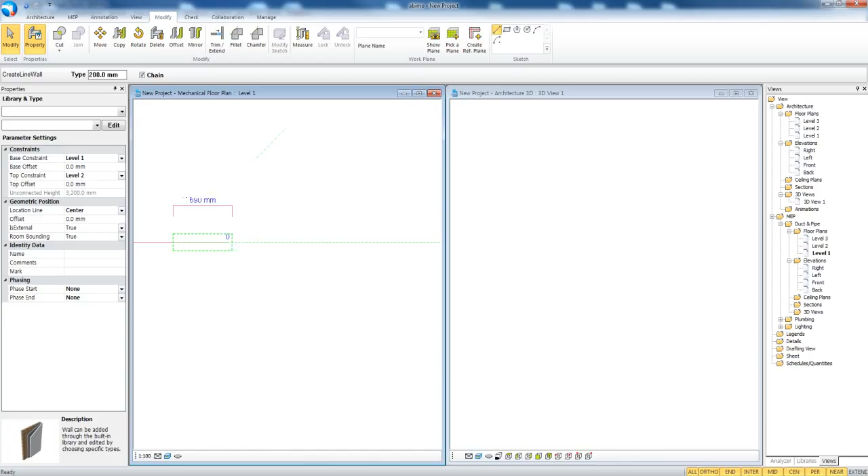So let me start with the modeler. The ABIMO Modeler is designed to model various types of building components. With the support of Parasolid Designer, the user of the ABIMO Modeler is able to model from the very basic architectural elements to the most complex geometries.

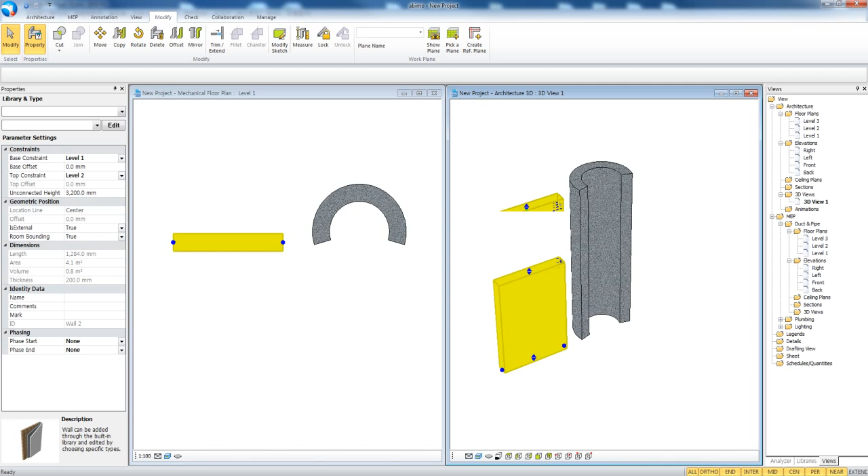By simply choosing a building component category from the menu, the user can easily start modeling the desired structure in a three-dimensional virtual space. Modeling in the ABIMO Modeler can be roughly classified into two types: linear type modeling and planar type modeling.

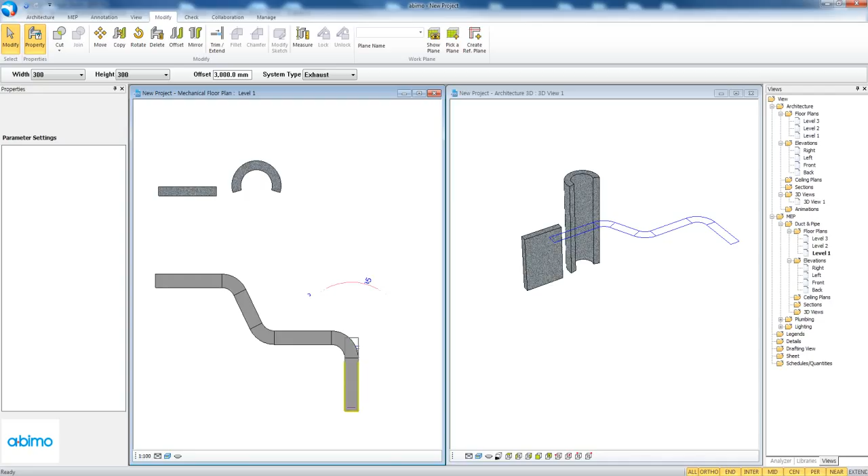Linear type modeling is a type of modeling where elements are modeled through clicking start points and end points. Through defining starts and ends, and eventually defining lines, certain elements are modeled according to the direction and length of the vector. Elements modeled through the linear type modeling include walls, stairs, ducts, or pipes.

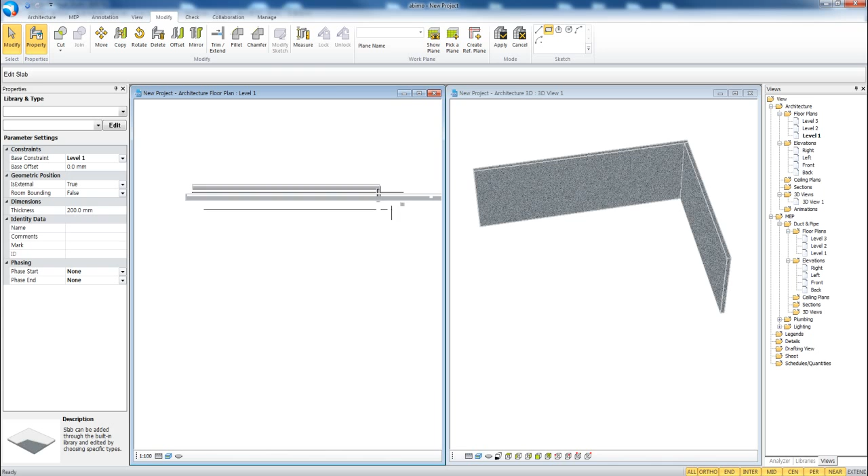Planar type modeling is executed through defining a certain outline of an area that defines the outline of the element you'd like to model. Here especially, you are automatically switched to the modifying mode, where you can edit or delete outlines before you click the apply button for it to get modeled into the actual element. Elements modeled through planar type modeling are floor slabs, ceilings, roof, spaces, etc.

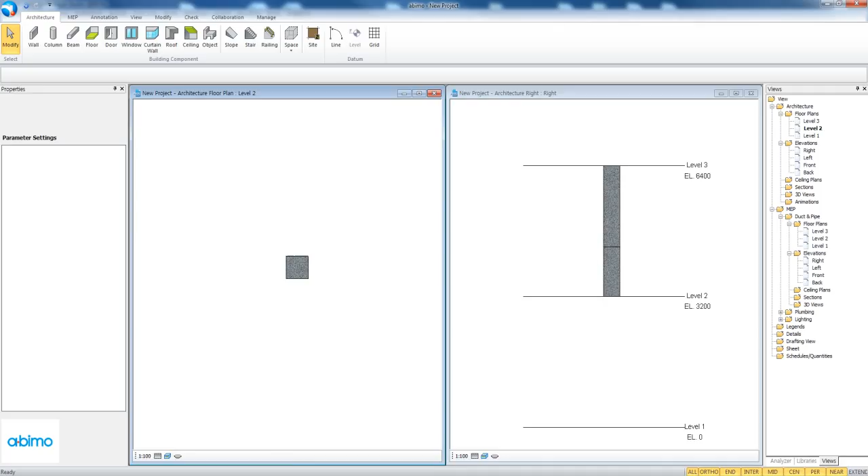Every element modeled in the ABIMO Modeler is tied to a certain level parameter. This means that each model is associated with a level, and its form, dimensions, and existence is dependent on how the level is defined. Take this column for example.

In elevation, you can see that the base is constrained to a certain level, in this case level 2. On changing the base constraints, you can see that it moves to a different level. By setting a top constraint, you can also link the top of the column to a certain level as well. And of course, when deleting a level, elements that are tied to that level are deleted with it.

Certain elements can be loaded from the library and inserted into the project. Here's an example of loading an escalator from the library and placing it into the project. Customized elements can be modeled in the library editor by the user and loaded back to the project.

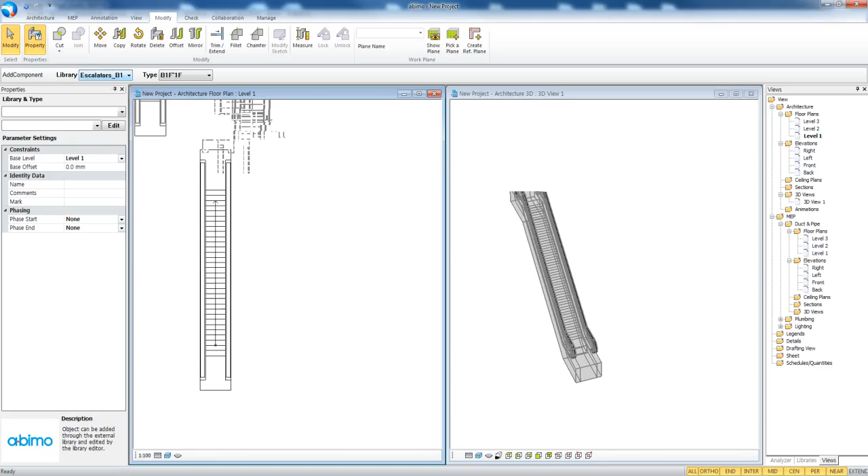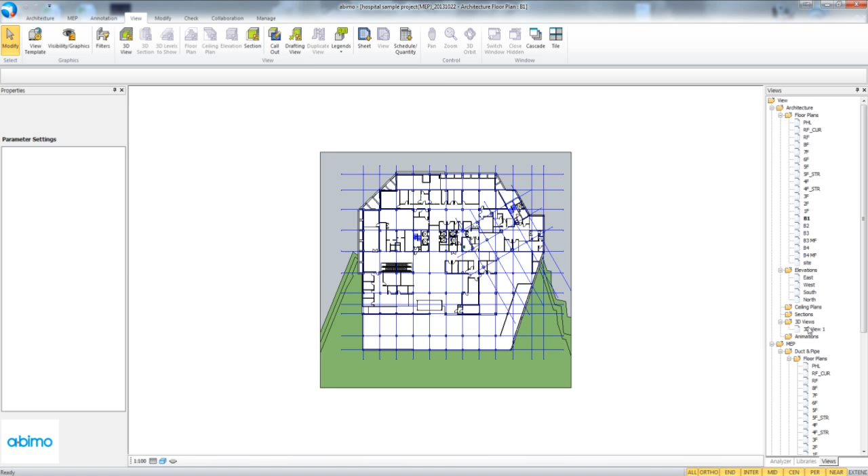This is an example of a project model from the ABIMO Modeler from scratch. You can see that all levels are showing modeled space of each story. Different elements are mapped with different materials. The main modeled elements include walls, floor slabs, columns, and beams. There are also other elements such as windows, curtain walls, stairs, and escalators, all modeled with the ABIMO Modeler.

Models in the ABIMO Modeler can be displayed in different types of visibility modes, such as hidden lines, wireframe, X-ray, shaded, or realistic. And now the ABIMO Checker.

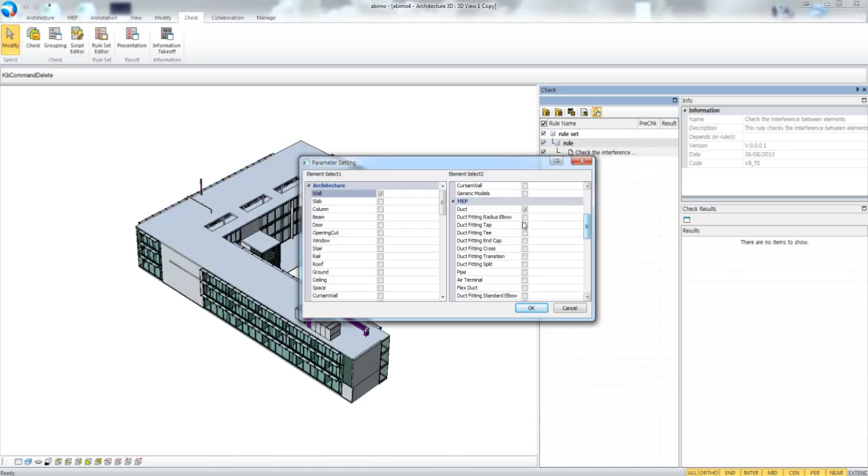The ABIMO Checker is a platform on which you can check the model project to see if it meets certain requirements, such as building regulations, area requirements, or rules for handicapped accessibility, and so on. Not only does it validate regulations, but it's also capable of checking physical conditions, such as interference between elements or connection validities. Here, I will check to see if certain elements run into certain other elements.

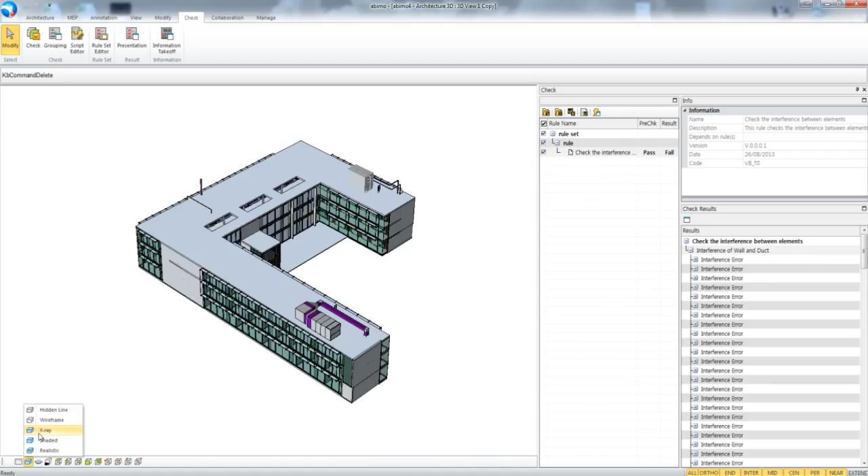After opening the project that I want to check, first I'll start with loading a pre-customized rule set. A rule set is a file made up of a combination of different rules for you to check on your project. In this case, I've set the parameters so that it checks the interference specifically between walls and ducts.

After loading the rule set, you then click on the Check button, and the checker will automatically check the model and show the checking results on the Check Results window. By selecting the detected particular elements on the Check Results list, the elements are highlighted in the model.

Checking if mechanical elements like ducts or pipes are connected to each other. This is an example of checking physical conditions of a model through a coded script.

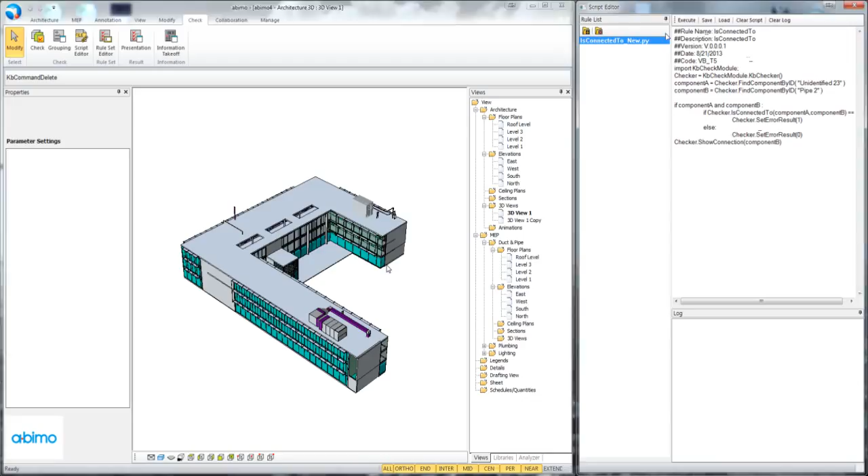By clicking on the script editor, you are able to load Python scripts that are written to check various conditions of the model, and in this case, the connection conditions of ducts. By simply typing in the ID of the ducts you want to check into the script, it automatically figures out the result for you.

Here you can see that the result showed a true status, which means that the ducts I've selected are connected. The fact that the ABIMO Checker can run scripted rules to check the model shows you how flexible it can be to accommodate various regulations.

Also, with the rule set editor, you can edit and combine different rules to create your own set of rules. So the significance of the ABIMO Checker is that it's highly adjustable and can be customized to nearly any type of rule imaginable.

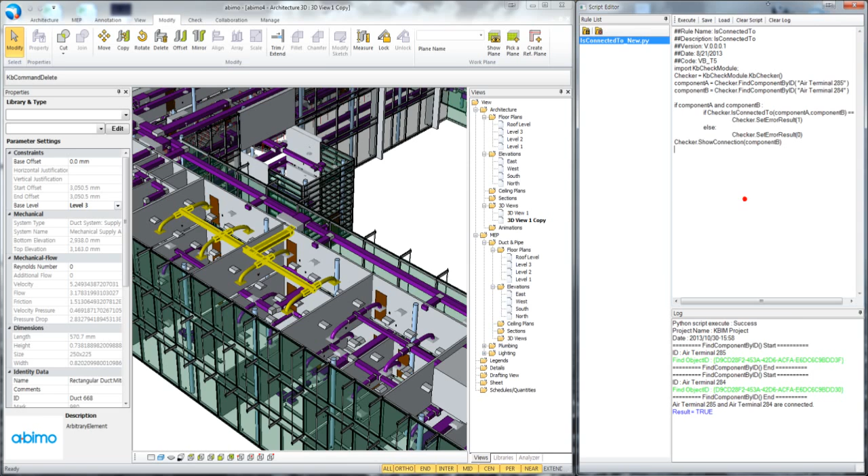The ABIMO Collaborator is a powerful collaboration system which lets you share a project with multiple collaborators. After connecting to the ABIMO server, the user can create a group for the team you're working with. By assigning each individual with different levels of authority to the project, you can set up an efficient working system for multiple people to collaborate.

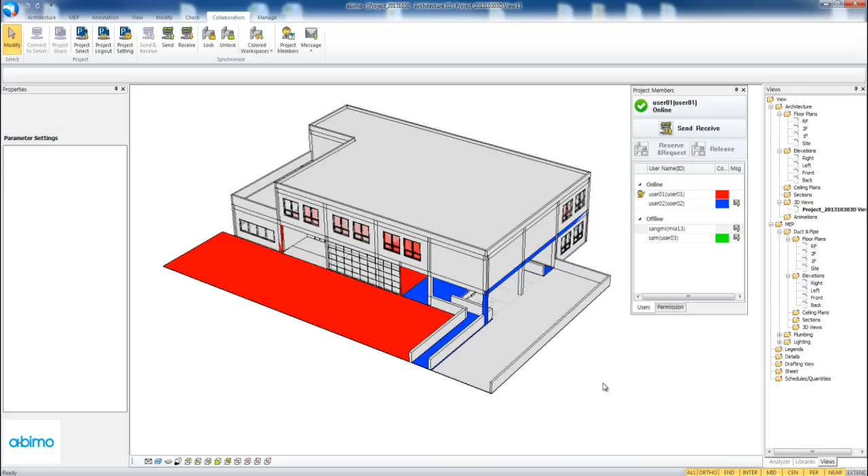A project can be uploaded to the ABIMO server by one of the collaborators for the other collaborators to download. Once downloaded, each collaborator can be assigned an original color of their own, and in a modeling process, each element added by a certain collaborator can be displayed by the original color the collaborator is assigned with.

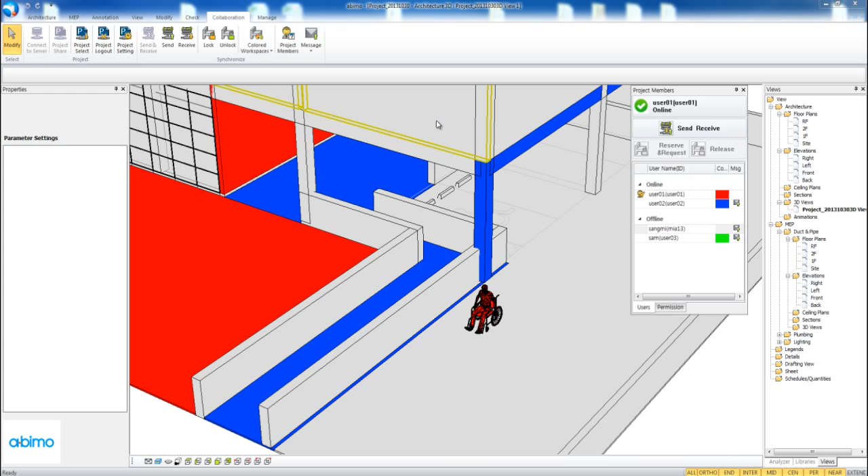Through the color coordination, different actions executed by different collaborators are visually expressed in the model to prevent confusion and to bring clarity to the collaboration process.

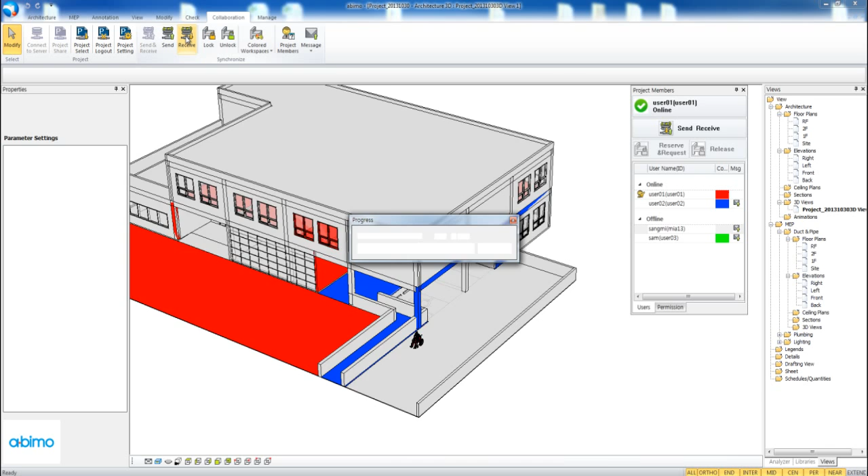Changes in the model and other updated information of the project is sent and received within the collaborating group so that you don't have to re-download the entire project again. Also, certain elements in the project can be locked or reserved through the server. This prevents conflicts that can occur when multiple people are working on the same element.

There are also small perks in the ABIMO Collaborator system as well. This integrated messenger, for example, can be used as a general communication system among the collaboration group.

So today, I've had the privilege of introducing the ABIMO Modeler, the ABIMO Checker, and ABIMO Collaborator to you. But there's another thing I'd like to introduce. In fact, it's one of the most important things about our solutions I'd like to introduce today. It is the fact that the ABIMO Modeler, the ABIMO Checker, and ABIMO Collaborator is actually one thing.

The Modeler, Checker, and Collaborator are all integrated into a single platform called ABIMO. This is to provide you with a totally synthesized experience of an integrated modeling environment.

For instance, in the ABIMO environment, there is no need for you to export your project out to other platforms to check your model. It is all done within the same window. Here you can see that I am loading the Checker platform on the same window that I was modeling.

After checking certain rules, and when errors are detected, I can simply edit my model in the same window and check again with the checker to see if the error has been fixed. Having multiple solutions in a single platform does not only save your time and effort, but also saves the inevitable data loss that happens during the process of converting a file into different file formats.

We believe that the integrated environment of ABIMO will drastically improve work efficiency of a typical BIM process.

Of course, this doesn't mean that ABIMO isn't compatible with other BIM solutions. Although we strongly believe in the integrated modeling environment that ABIMO provides, we also understand that file importing and exporting is inevitable most of the time during a BIM process.

This is why we've developed ABIMO to be fully compatible with other file formats that are conventionally used in the BIM industry. In fact, ABIMO is one of the most open platforms in terms of file compatibility, as it is capable of importing and exporting DWG and DXF files, as well as importing Collada files.

It also fully supports the importing and exporting of the international standard IFC format, which makes ABIMO compatible with most of the BIM softwares in the industry.

VirtualBuilders is extremely proud of what we've come up with, and both pleased and honored to have had an opportunity to show it in front of the Siemens AEC community. We believe that ABIMO will be one of the most powerfully efficient BIM solutions in the industry, as well as a competent partner for the other BIM solutions.